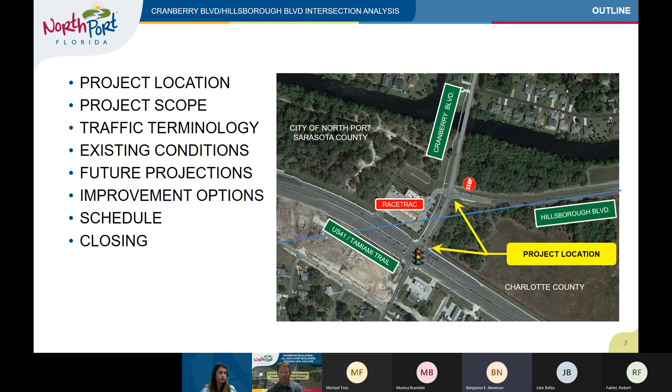With that, let's move to slide 7. In the outline of our presentation, we'll show the project location, the project scope, then get into traffic terminology to identify the existing conditions, how we project future traffic, the improvement options we've come up with initially, the schedule of the project, and closing comments, then open the presentation to public comments. Please move to slide 7 or 8, and I'll turn it over to Bill Adams.

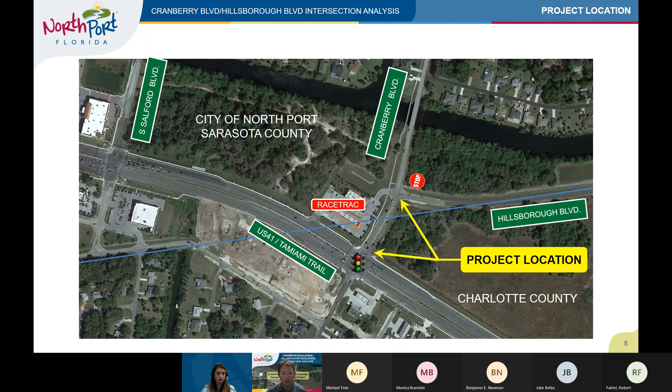Here's the project location. As mentioned, the two intersections are located near the border of Charlotte County with the city of North Port and Sarasota County, such that one intersection falls within the city of North Port, whereas the other falls within Charlotte County. That's one of the challenges, the close proximity of the two intersections.

Looking at the project scope, this is currently Phase 1, which is performing an engineering analysis and developing conceptual improvement options for the Cranberry/Hillsborough Boulevard intersection, in combination with the Cranberry Boulevard/US 41 intersection, again due to the proximity.

Phase 2 is an optional future phase, which would be to prepare the plans for construction of improvements that we identify during this phase. So the study limits are, again, the intersection of Cranberry/Hillsborough Boulevard and Cranberry/US 41, including looking at an expanded area for traffic details.

The traffic evaluation is based upon the existing year, then projecting traffic volumes out to a future design year of 2045. Hillsborough Boulevard is currently an existing 2-lane roadway. In the future design year, it's going to be a 4-lane roadway based on the Charlotte County 2045 long-range transportation plan.

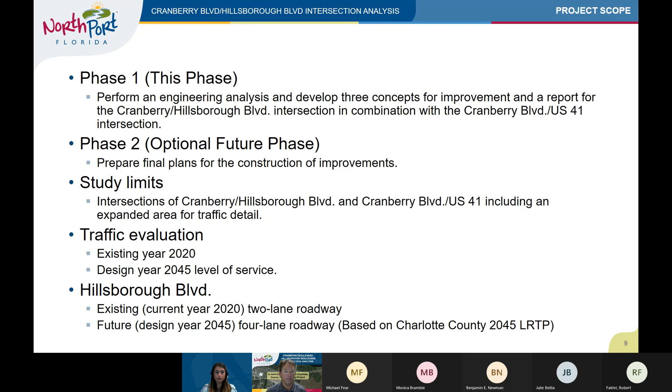I'll turn it over to Linda, who's going to talk about the traffic evaluation. Thank you, Bill. On slide 10, we explain level of service, a term we use in traffic engineering to determine how a roadway intersection or segment is operating. Level of service is a standard measurement based on vehicle delay and speed that reflects the relative ease of traffic, and it works on a scale of A to F.

Level of service A is your free-flow traffic condition with very minimal delay and cars being able to travel at the posted speed limit, whereas level of service F denotes a highly congested traffic condition with excessive delay.

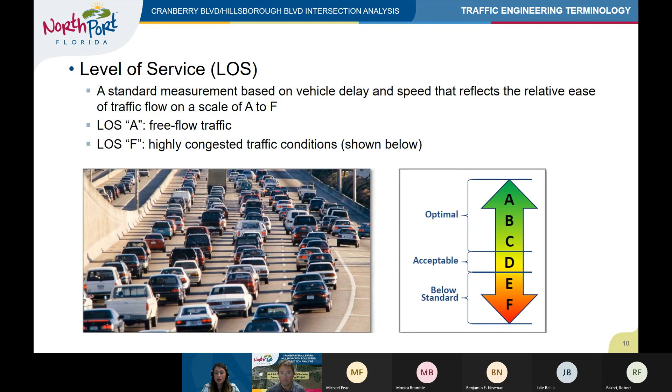Slide 11. For this study, we went out and collected traffic counts back in October of this year, and turning movement counts were taken at both of the study intersections. We also collected 3-day vehicle classification counts on certain segments in order to better understand traffic conditions of the study area. These traffic volumes were compared to FDOT count stations in the area to make sure the counts collected were in line with historical data and there were no COVID-related issues with the data.

As you can see from the counts on slide 11, the heavy movements at the US 41 and Cranberry intersection are the US 41 through movements and also the southbound Cranberry right turn onto US 41, and that is a signalized intersection. At Cranberry and Hillsborough Boulevard, the Hillsborough Boulevard approach is stop-sign controlled, and the heavier movements at that intersection are the through movements on Cranberry Boulevard and also the left-turning movement on Hillsborough, turning left southbound onto Cranberry towards US 41. Slide 12.

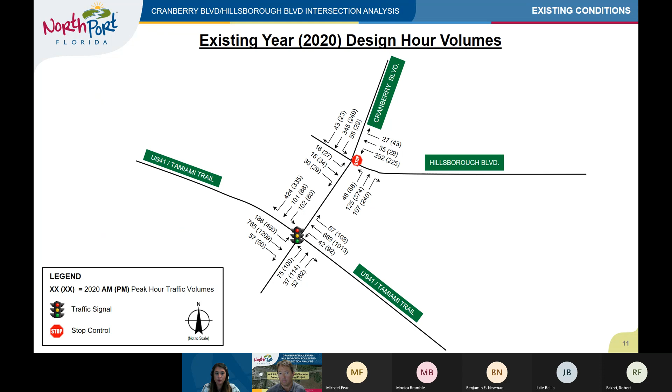On slide 12, we analyzed the existing conditions level of service using Synchro traffic operational analysis software. For the intersection of Cranberry and Hillsborough, we used the Highway Capacity Manual stop control criteria. From the table on slide 12, you can see in the PM condition, the intersection will operate at unacceptable level of service E, with an overall intersection delay per vehicle of 67.9 seconds. At this intersection, it's the Hillsborough Boulevard approach that is experiencing delay due to the stop sign and the free flow condition on Cranberry Boulevard.

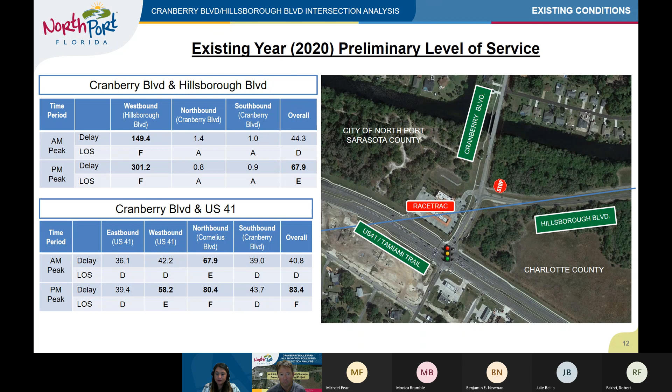At the US 41 Tamiami Trail signalized intersection, the PM peak is also experiencing unacceptable level of service, with 83.4 seconds of delay. Slide 13.

The next thing we analyzed for existing conditions was collisions and reported crashes for the two study intersections. We looked at a historical five-year period from 2015 to 2019, and there were 2 crashes at Hillsborough and Cranberry, and 114 at US 41 and Cranberry. There were no fatal crashes reported at either intersection.

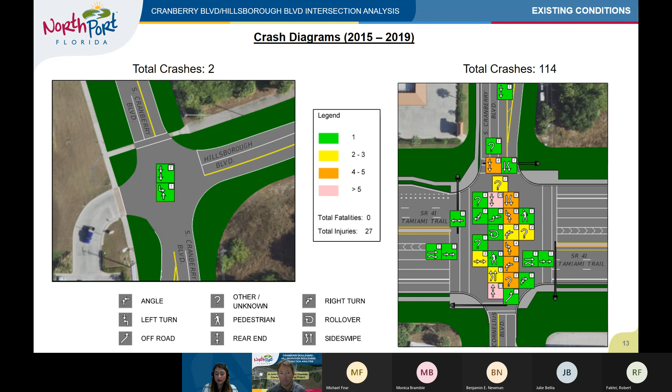The most common type of crash that occurred were rear end crashes, with the second most common type being coded as either unknown or other, and sideswipe collisions. Slide 14.

The next step completed in this study was looking at future land development and traffic growth in order to determine a growth rate for the study area, to forecast our 2045 design year traffic volumes. As mentioned earlier, Hillsborough Boulevard is being widened to 4 lanes, so that was taken into account, along with the connection of Harbor Boulevard to Hillsborough Boulevard.

We utilized the FDOT District 1 regional planning model, which takes into account future roadway and land development. The District 1 regional planning model has a base year of 2010 and a horizon year of 2040. We used this model to develop a growth rate for the area, then applied that growth rate to our existing year data, collected in 2020, and grew our forecasted volumes to our design year, 2045. Slide 15, please.

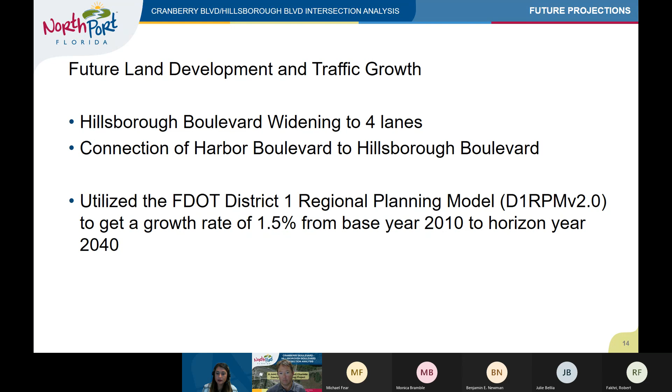Slide 15 shows our forecasted volumes for the AM and PM peak hour. The turning movements that were forecasted resemble the same existing travel patterns and heavy movements, and also took into account the same heavy AM and PM peak flow directions.

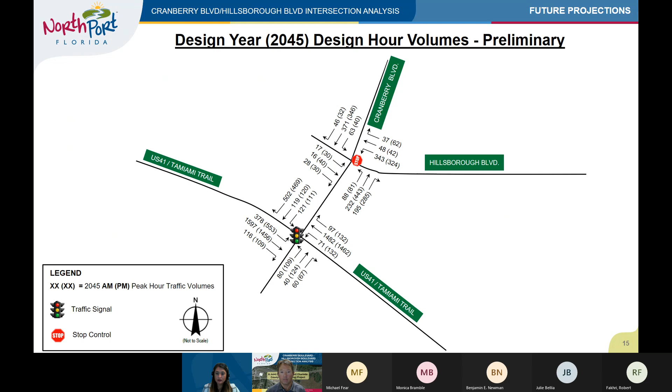The next slide, slide 16, please. In slide 16, we did a no-build future level of service analysis. The no-build takes into account the existing roadway geometry in place, but uses the 2045 forecasted volumes. The only difference in the no-build from existing conditions is that Hillsborough Boulevard was modeled as a 4-lane roadway, since we know that project is in the LRTP.

So for the no-build condition, the Cranberry and Hillsborough Boulevard intersection, if it remained a stop control intersection, is expected to fail in both the AM and PM peak periods, mostly due to the westbound approach of Hillsborough Boulevard experiencing large delay times. The Cranberry Boulevard and US 41 intersection is expected to fail in the PM peak period with an overall intersection delay of 80.1 seconds.

I will now hand it back over to Bill, who will present some concepts in order to alleviate some of these delay times. Okay, thank you, Linda.

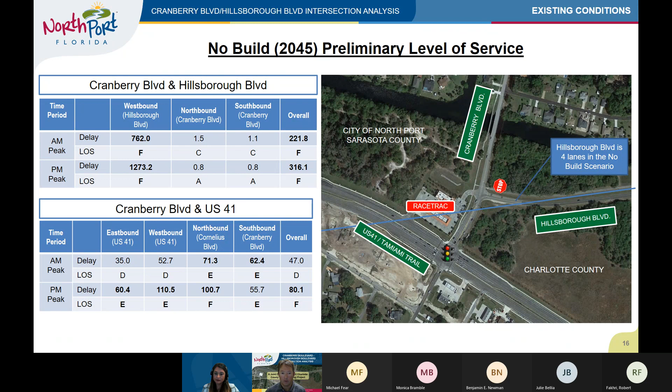So now going to slide 17. As Linda identified, the evaluation shows that there is a need for improvement. The intersections are not operating according to the desired level of service for either the existing or future conditions.

So we're developing 3 alternatives for the design year traffic and comparing those with the no-build alternative. I will get into the details of each of these alternatives in the coming slides.

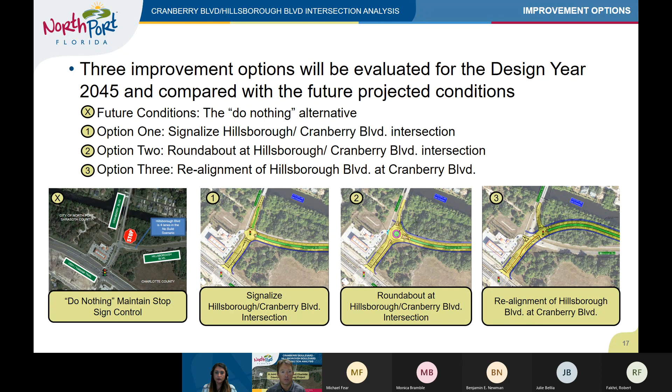We're also evaluating the intersection of Cranberry Boulevard with US 41 due to the close proximity of the two, to ensure that it will function to the desired level of service. The improvements we would anticipate on US 41 will be somewhat limited, most likely, and could include restriping the eastbound left turn to provide a dual left turn lane.

We've prepared draft exhibits of the options that we're going to develop for this presentation. In the future, we will prepare cost estimates for each refined alternative, and also determine the level of service of those alternatives.

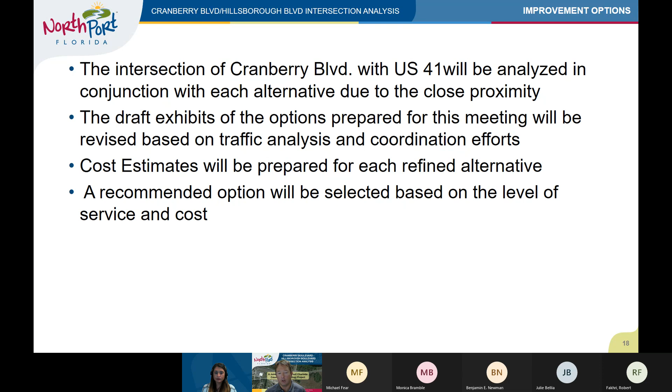And then the ultimate goal is to provide a recommended option to carry forward. Now going to slide 19.

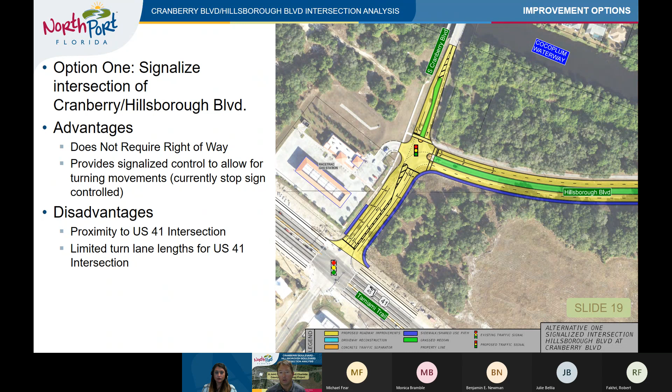Option 1 would be to provide improvements within existing right-of-way, signalizing the intersection of Cranberry Boulevard and Hillsborough Boulevard. The advantages are that it does not require right-of-way and provides signalized control to allow for turning movements for Hillsborough Boulevard, since those vehicles currently can't find a gap to turn onto Cranberry. The disadvantage is that it doesn't improve the issue with the proximity to the US 41 intersection, which limits the turn lane lengths for that intersection.

Moving to slide 20. Option 2 would be a roundabout at the intersection of Hillsborough and Cranberry Boulevard. This could allow for longer turn lane lengths, since it doesn't have to compete with other left turn lanes going north, as those occur in the roundabout. It has conflict reductions over the stop sign controlled intersection and doesn't rely on electricity. The disadvantage is that it does require some right-of-way.

At this time, we haven't performed all the traffic analysis to determine if it needs one or two circulating lanes, which would be the lanes going around the roundabout.

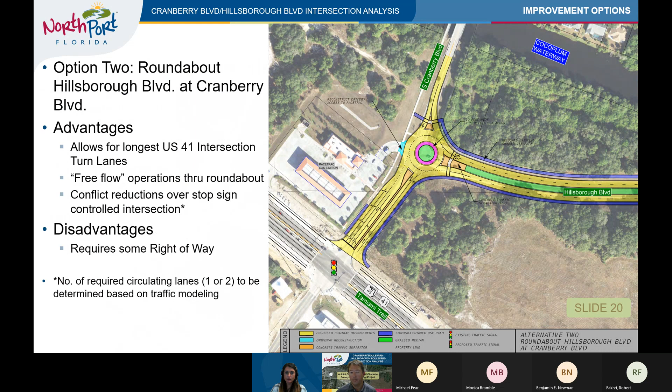Going to slide 21. Option 3 would be the realignment of Hillsborough Boulevard at Cranberry Boulevard, which would take the future 4-lane Hillsborough roadway and connect that to US 41, instead of Cranberry connecting to US 41, and then redesigning the intersection of Cranberry with Hillsborough to tee Cranberry into Hillsborough. This could make sense because Hillsborough is the major roadway, the 4-lane roadway, and it allows for some longer turn lanes because it moves the intersection somewhat to the north.

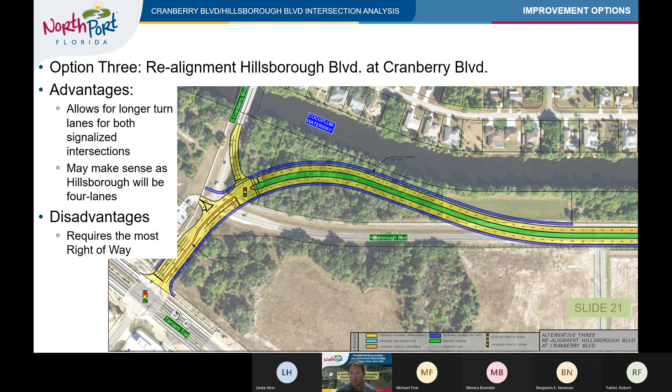The disadvantage of this alternative would be that it requires the most right-of-way. So moving to slide 22, and I will turn it over to Ben to discuss the schedule.

Then we will move along after the draft report to refine all of these alternatives, with a better design, cost, a better idea of the land values, and if there are any environmental issues that we need to perform studies for. And then we will finalize those alternatives into a presentation to both the City Commission and the Charlotte County Commission.

Following those presentations in early February, we will take comments from the 2 commissions and prepare another presentation for a second public meeting. After that, which will be in late February, we will complete the final report and have it completed and submitted by the end of March of 2021.

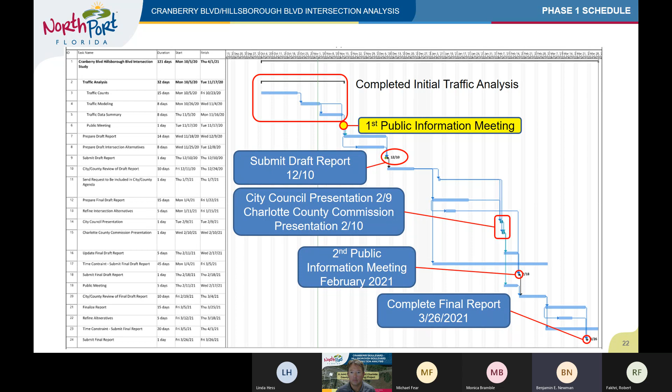So with that, if we move on to slide 23, I'll turn it over to Mike Fear.